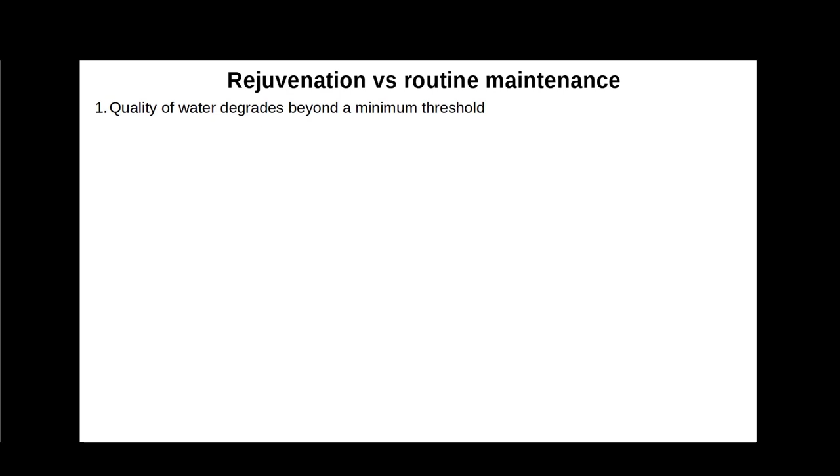Next, let us consider when we need to call for a rejuvenation instead of relying on routine maintenance. There are 4 cases in which rejuvenation is called for. 1. The quality of lake water degrades beyond a minimum threshold. 2. The health index score of the lake drops below limit.

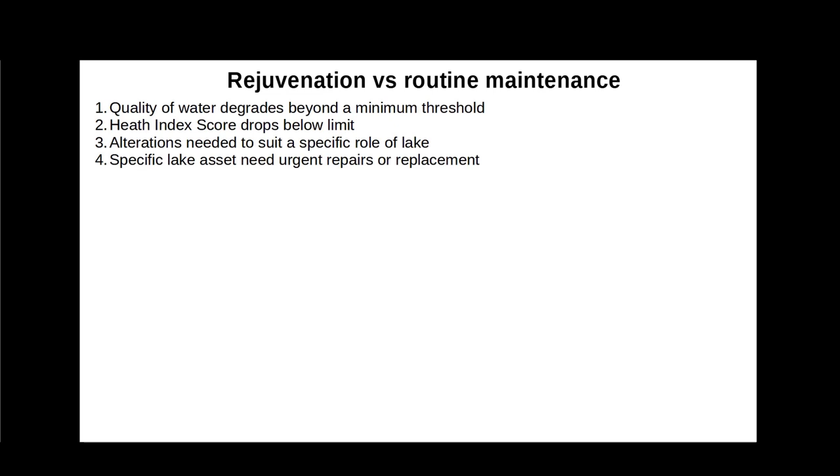3. Alterations are needed in the lake to fulfill a specific role of the lake. This typically happens when the lake is assigned a new role. And 4. Specific lake assets need urgent repairs or replacement. Here is the master list of lake assets for reference.

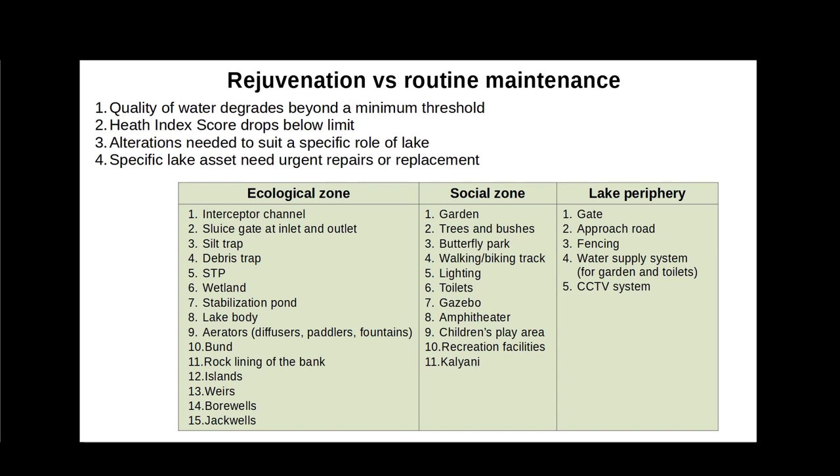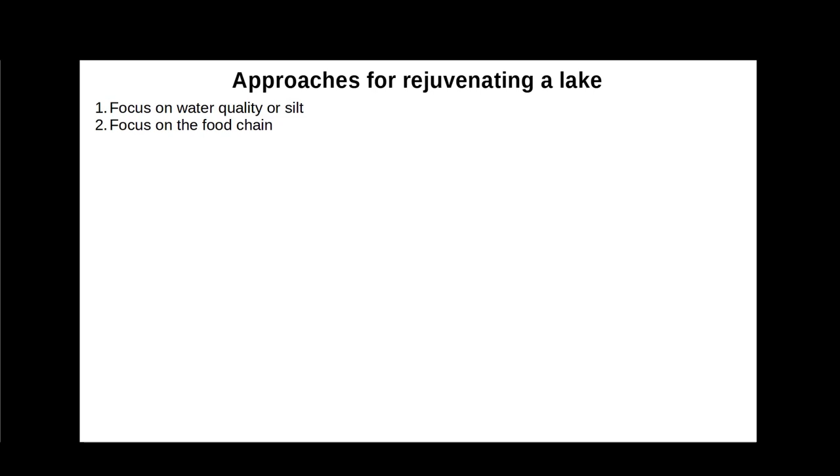The rejuvenation project for a lake can have 6 different focus areas. 1. The focus of the project is on improving the water quality or desilting of the lake. 2. The focus is on correcting the food chain, or adjusting the littoral zone of the lake. 3. The focus is on creating a habitat for specific target group of birds, etc.

4. The focus is on repairs or replacement of specific lake assets. 5. The focus is on removal of encroachment and recovery of lake land. Or 6. The focus is on changing the role of a lake, with a complete restructuring. We can think of at least 10 roles for Bangalore lakes. A lake can play multiple roles at a time.

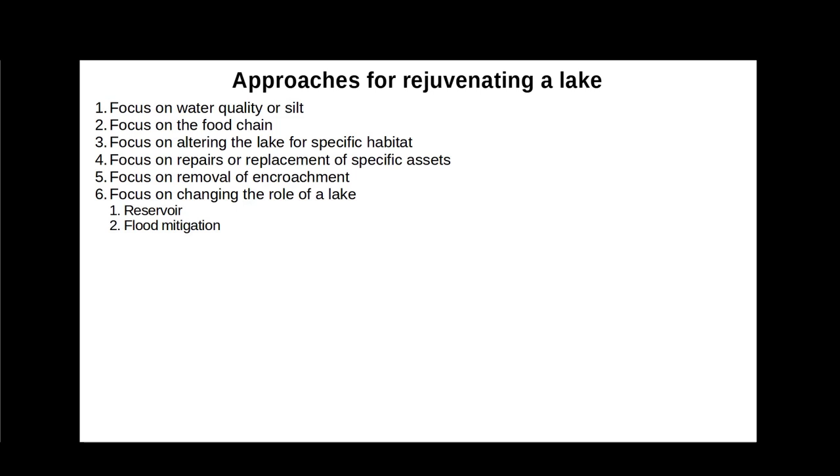1. As a freshwater reservoir. Here, the maximum holding capacity and control on water release is desirable. Also, the lake water must not get contaminated. 2. Flood mitigation. Such lake is emptied before heavy rains arrive, and they absorb the flood waters. 3. As a buffer tank, where fluctuation in the flow is absorbed by holding the water for some time.

4. As a habitat for migratory or local birds. This involves setting up vegetation for food and nesting of birds. 5. Setting up a biodiversity park for vegetation and birds. 6. Setting up jogging, walking, and biking tracks around the lake. 7. Setting up the lake as a water sports center.

8. Optimizing the lake for fishing, either as a hobby or for livelihood. 9. Setting up a children's park. And 10. A community center such as amphitheater, hall, etc. Next, we will see a proposed framework for lake rejuvenation and management, in which sweeping reforms are suggested.

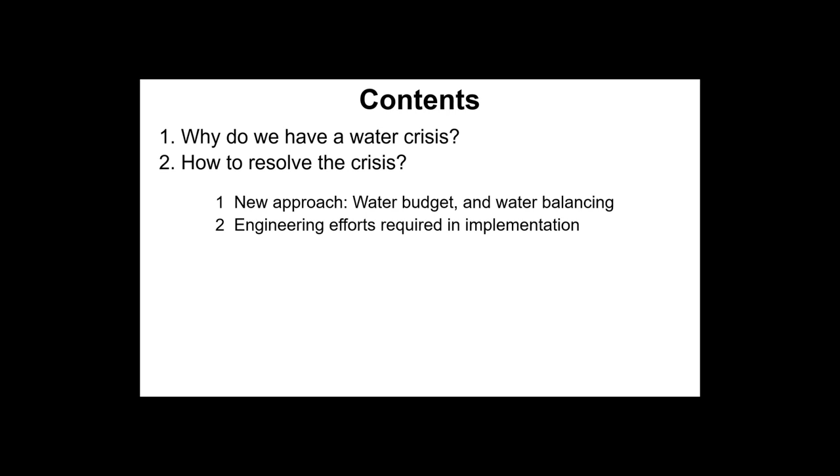In this presentation, we will cover the following topics. 1. Why do we have a water crisis? And 2. How to resolve the crisis. We will consider 4 aspects of the solution. 1. New approach in water budget and water balancing. 2. Engineering efforts required in implementation. 3. Changes required in government organization. And 4. New workflow for lake system management.

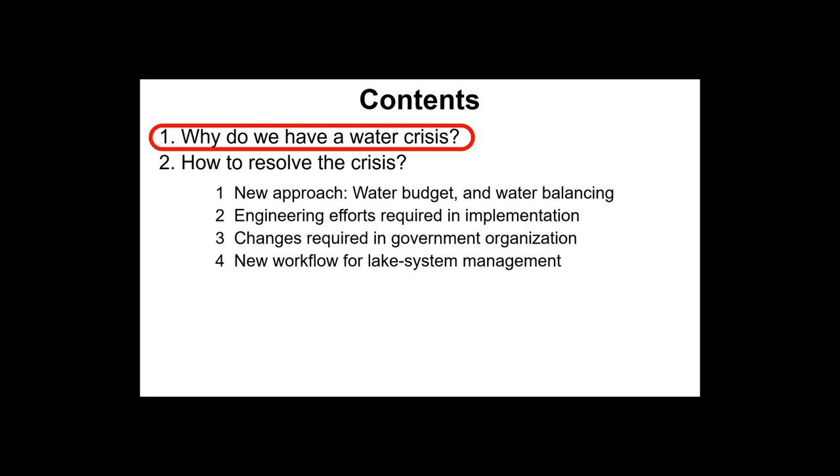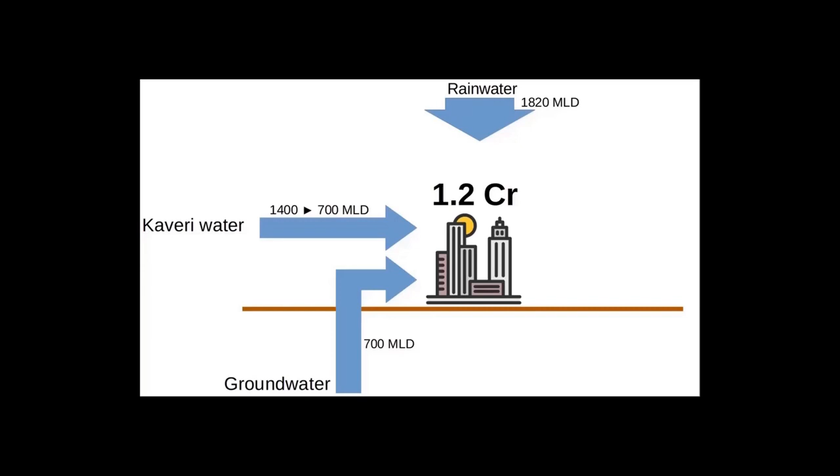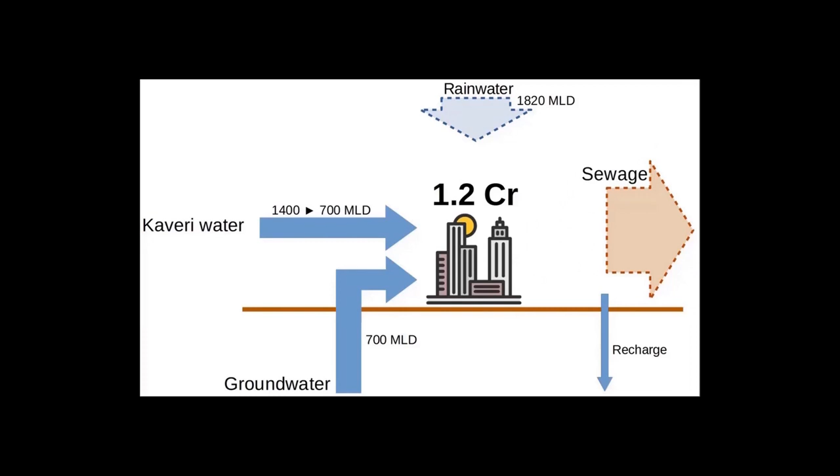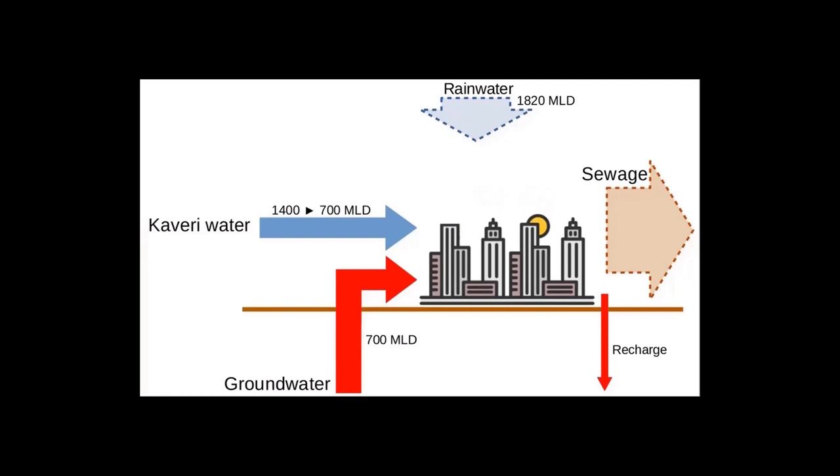Thus we draw 700 million liters of groundwater every day, and recharge only a fraction of it. As a result, our groundwater is depleting rapidly. While our water supply will not improve, our growing population will go on demanding more and more water. Thus, by next year, we will have no groundwater at all. If any groundwater is left, it will be unfit for use. We are also polluting what groundwater is left.

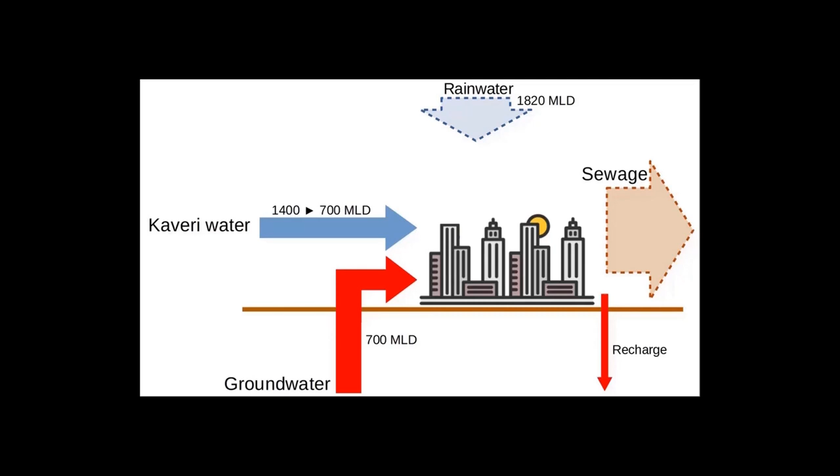In short, we will have a 50% shortage of water by next year. And that will take grip of the city gradually, not overnight. How will we deal with this acute water shortage? The only solution is to stop wasting our 2 largest water sources, rainwater and sewage.

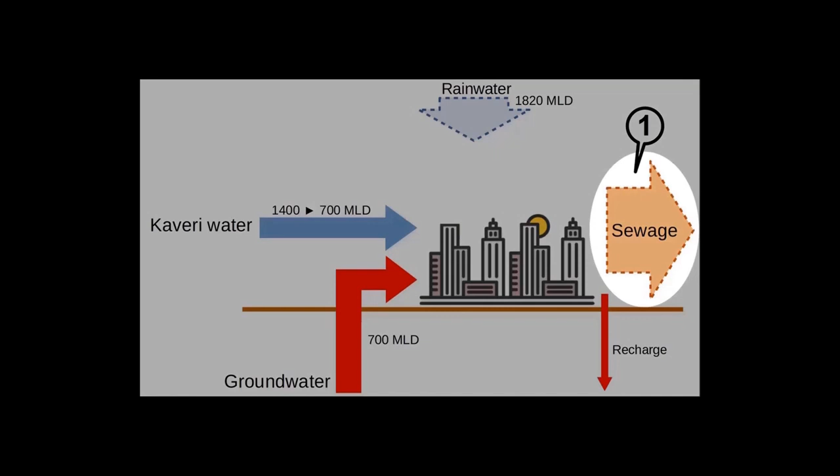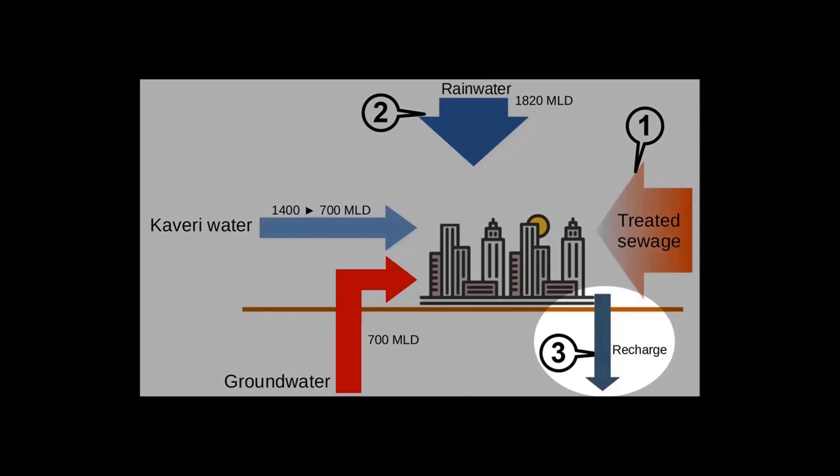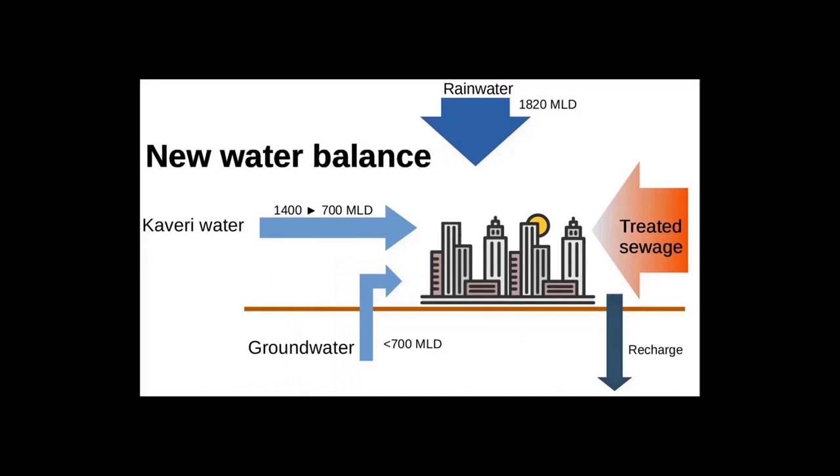Next, we will see the solution, which begins with water budgeting and water balancing. The solution consists of 4 parts. 1. Do not let the sewage leave the city, treat it and reuse. 2. Do not let the rainwater flow away. Capture it and use. 3. Boost the groundwater recharge with good quality water. 4. Use less groundwater till the water table improves. This is the new water balance, all over the city.

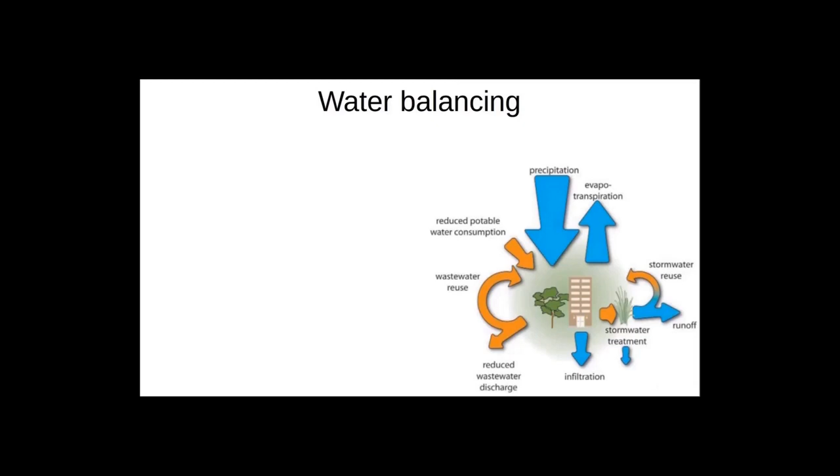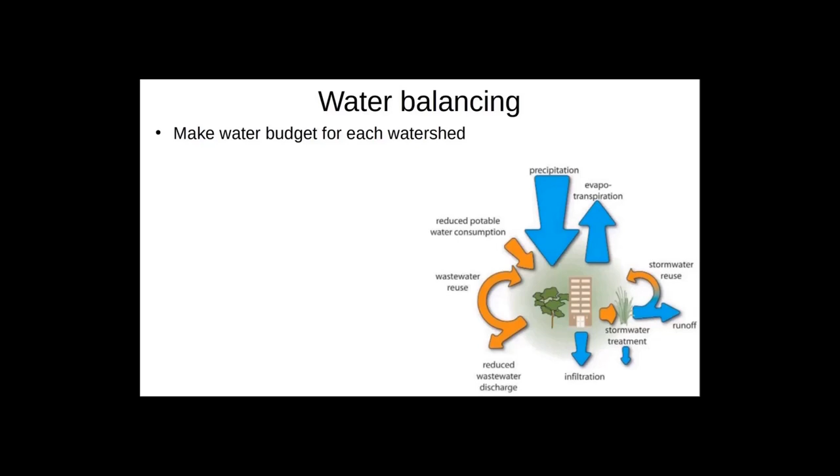So how do we implement that water balance model across the city? We must make a separate water budget for each watershed. Note that we cannot manage this task on the basis of wards or constituencies. Check how much water is needed, and how much water is actually available from different sources. Check if the available water is being contaminated. Launch drives to reduce water consumption.

Reuse the treated sewage, mixed with rainwater. The lake will collect rainwater and treated sewage in 3:1 ratio. This mix can be supplied to the area surrounding the lake. This is the new water balance, where we have enough water for our needs. But we must carefully monitor the quality of water in the drains, wetlands and lake, because that is the water we will consume.

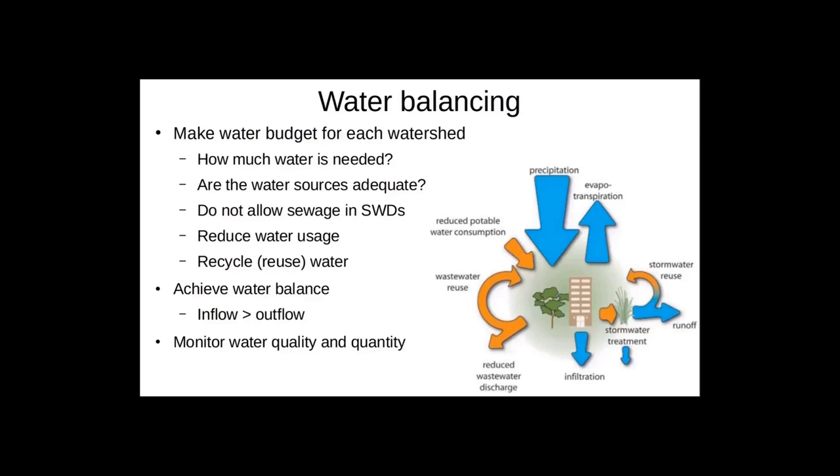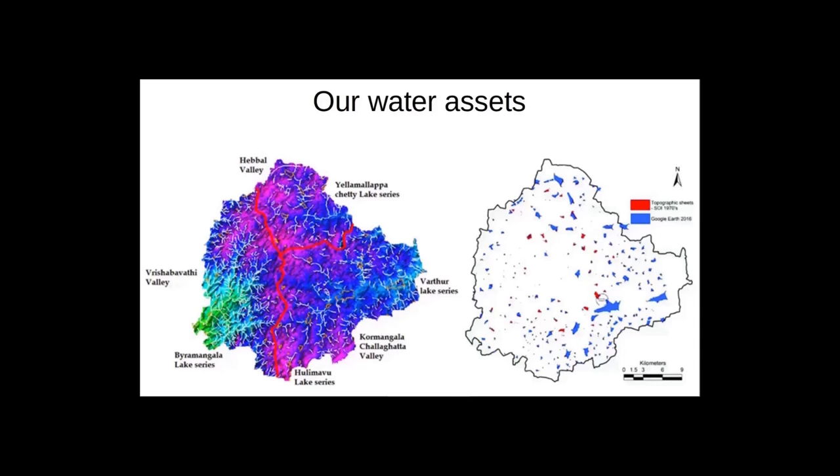To implement this strategy in the city, we must break down the whole terrain in watersheds, and then manage each watershed. These watersheds will not be contained within specific ward boundaries. To understand this, first look at our water sources across the city. The left picture shows the 3 valleys, with drains marked in white, and wetlands marked in yellow. The right side map shows our lakes. These are our water system assets. They will be used to store the rainwater and treated sewage.

This also calls for a paradigm shift in multiple areas. 1. For each watershed, set up a water budget. Account for incoming water and how much water is spent. 2. The water resources will be our lifeline. Therefore we must treat them as our precious assets. 3. Identify all stakeholders in the area, and balance their needs.

4. Involve the public in water resource management. Make all data in public domain. 5. Establish well-defined processes and declare them as public charters. Define metrics for all processes and share the data in public domain. And 6. Streamline the funding for water resource management.

Next, we will examine the engineering efforts required in implementing the solution. There are 4 major engineering challenges. 1. To provide totally separate pipelines for rainwater and raw or treated sewage. 2. To set up a large number of STPs and constructed wetlands required for water treatment. 3. To sink 1 million rainwater harvesting wells across the city. 4. Setting up the local water supply systems that recycle water in each watershed.

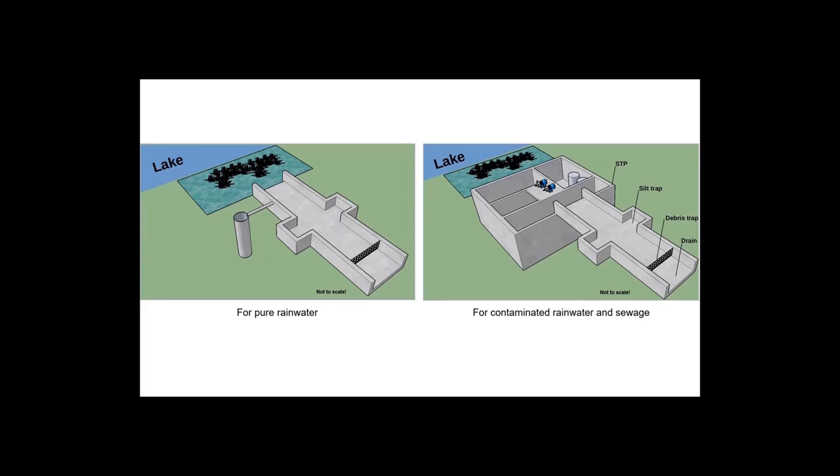Note that the overall holding capacity of the city lakes may not be sufficient. In that case, some water treatment may have to be done outside the city limits. In other words, we may need to set up the same infrastructure outside the city.

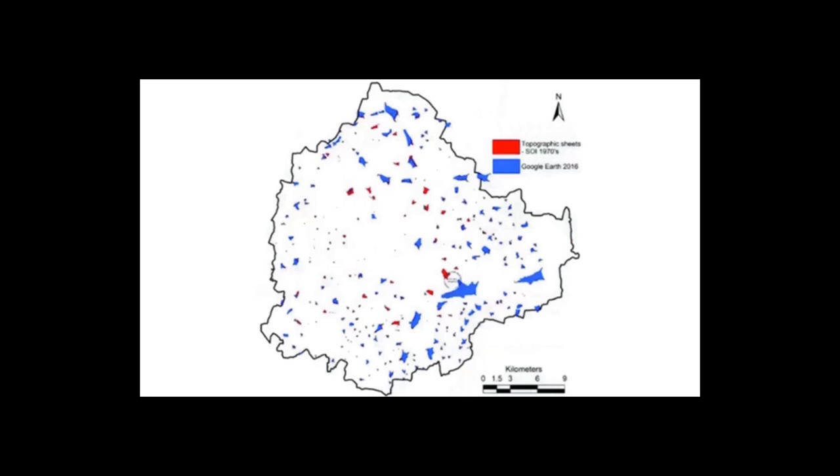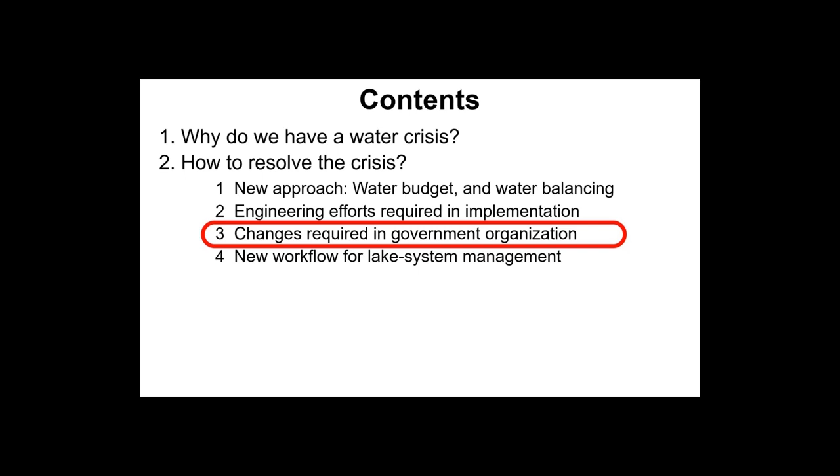In the previous section, we listed various water assets, which need to be used as a single system. However, the main problem is that these assets belong to different agencies. As a result, they do not plan and manage a unified water system. Therefore, for smooth implementation of the solution, some changes are required in the government organization. Now we will see how a change in the government organization streamlines the process.

Set up a central leadership with a single deliverable, which is integrated water resource management. Set up a cross-disciplinary expert team to guide this central water authority. The same team must reimagine the entire workflow and processes for water budgeting and management. All lake-related assets must be designed and managed as a set. This includes stormwater drains, sewerage lines, all STPs, rainwater harvesting wells, wetlands, and lakes.

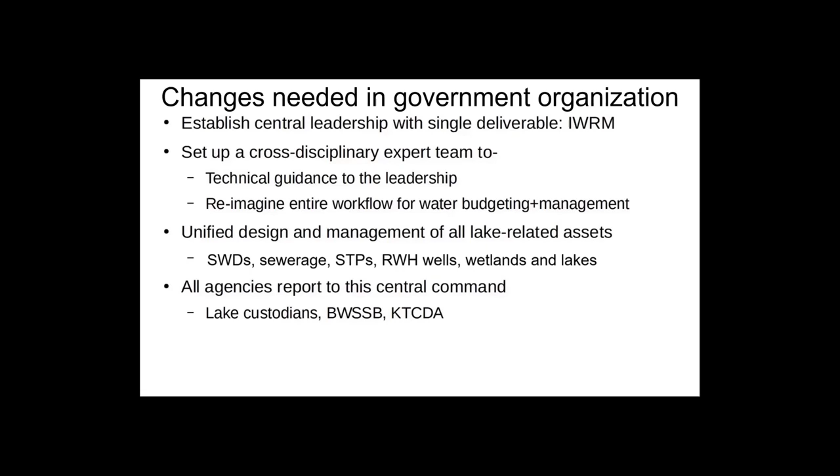All agencies dealing with water in any form will report to the Central Water Authority. These agencies include lake custodians, BWSSB, and KTCDA. Finally, the state government must allocate adequate budget for the water management. It must be recognized that the CSR contribution will amount to 5 to 10% at best.

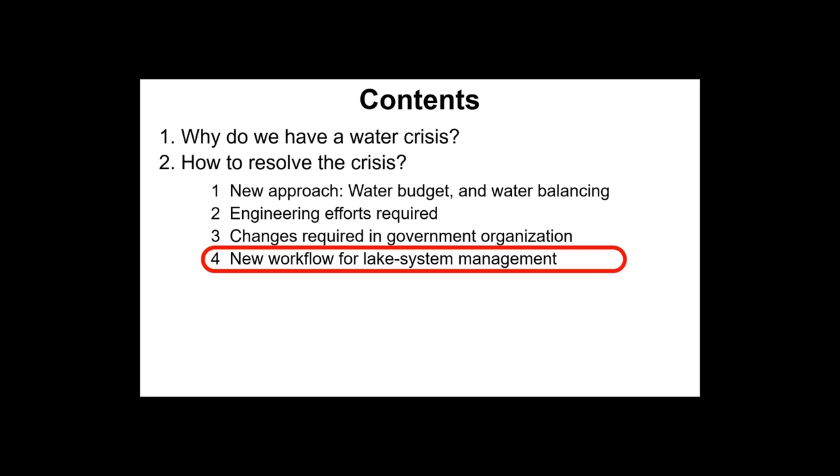Currently, lake rejuvenation projects are taken up sporadically. Even after the rejuvenation, the lake continues to receive sewage. Thus all the effort is wasted. Worse, rejuvenation of the lake does not contribute to the city's water management goals. Next, we will examine the new proposed workflow for lake system management.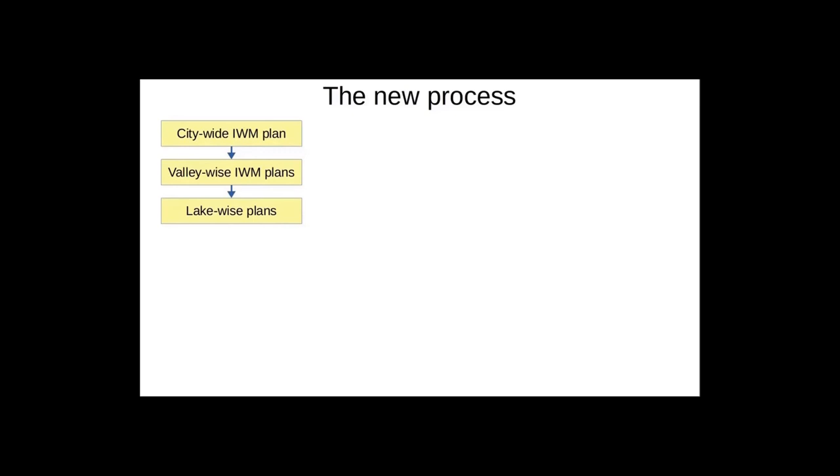The process starts with a city-wide integrated water management plan. From this, valley-wise water management plans and targets are derived. From these valley-wise plans and targets, lake-wise plans and targets are derived. At this stage, we need to form a lake committee from all stakeholders.

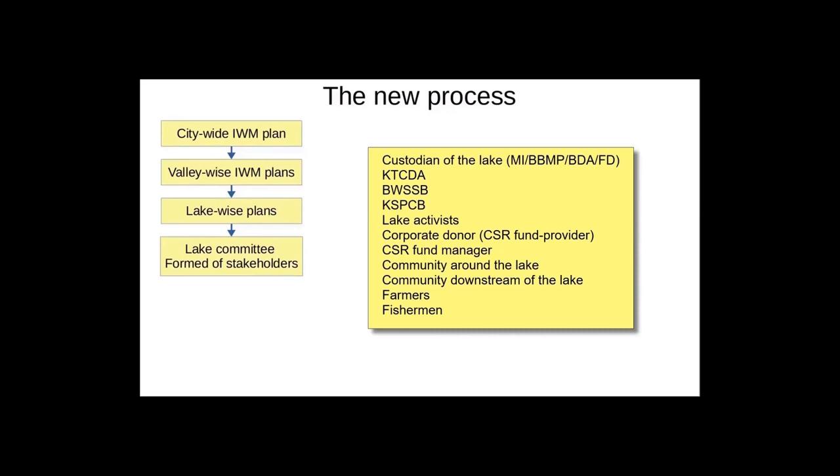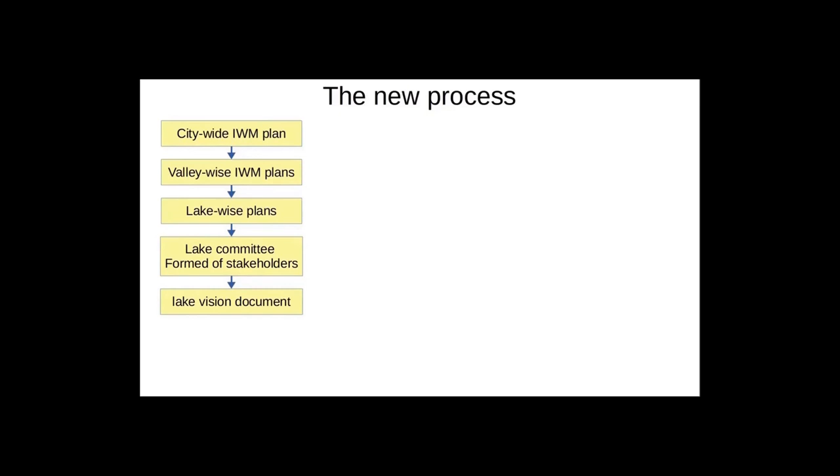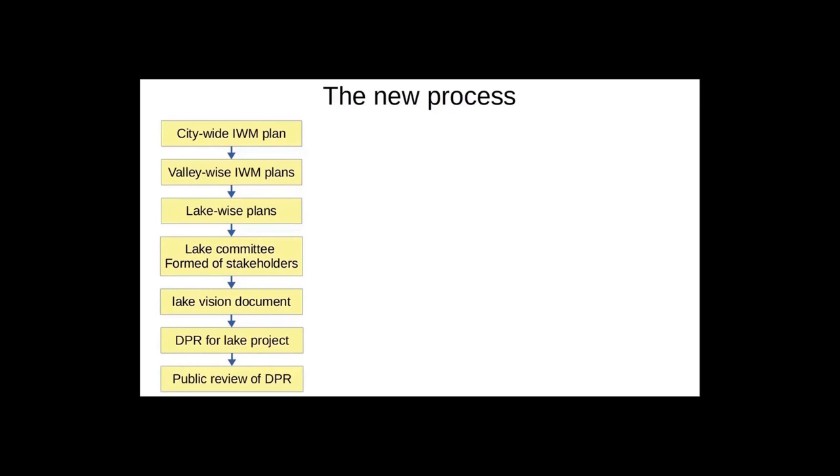This team defines the lake vision document, with local aspirations. A detailed project report is prepared based on the lake-wise plans and lake vision document. This DPR is reviewed by public, and the lake team deals with all objections. This DPR is passed through a single window clearance system.

Based on the approved DPR, tenders are invited. The approved DPR is also used to attract sponsors. The state undertakes to provide the main funds, supplemented by the CSR funds. All details such as scope of work and sponsorship are finalized.

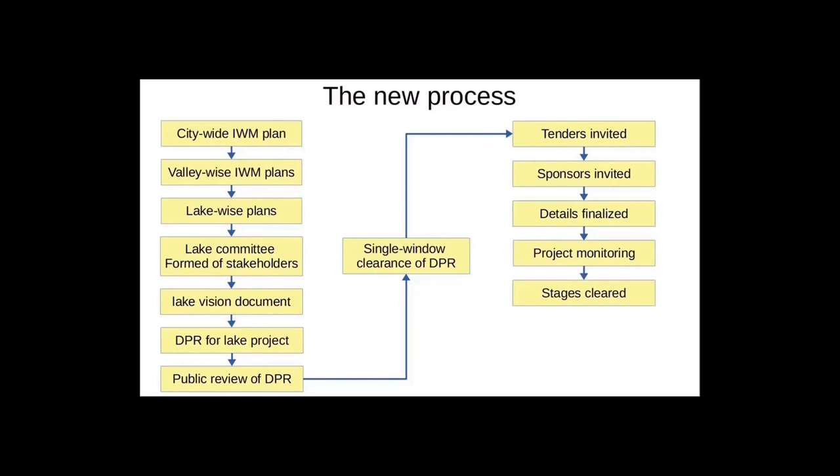The lake team monitors the progress of the project. The project is cleared stage by stage. As each stage is cleared, its payment is made to the contractor. Timely payments are crucial to ensure that there is no corruption. Once the project is completed, the team switches to day-to-day management mode. A separate contract is made to drive the lake system management.

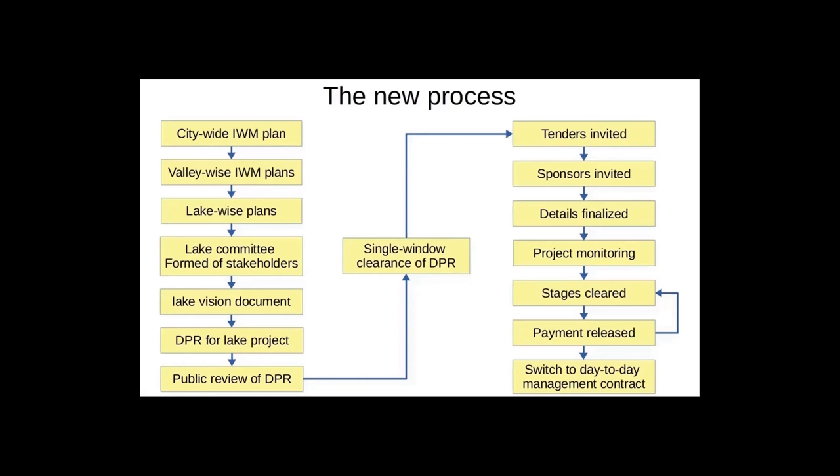We also need to re-engineer all the processes and procedures. We will see the existing shortcomings and the proposed improvements. These changes address 4 goals. 1. Management of lake system must be asset-based. 2. All stakeholders' needs must be balanced. 3. All stakeholders must be involved actively. 4. Governance in management of government and CSR funds.

First, we will see the changes needed to ensure that the management of lake system is asset-based. 1. Lakes are not valuated at all. Their value must be counted in terms of assets. 2. Government takes credit for announcing large budget projects, which don't materialize later. Credit can be given only when assets are actually created or rejuvenated.

3. Projects have questionable results. Projects must have specific asset-based targets. 4. There is no accountability for project spending. We must establish asset-wise accounting of spending. 5. Custodians get away with mismanagement of water assets. We must conduct social audit of assets to bring accountability.

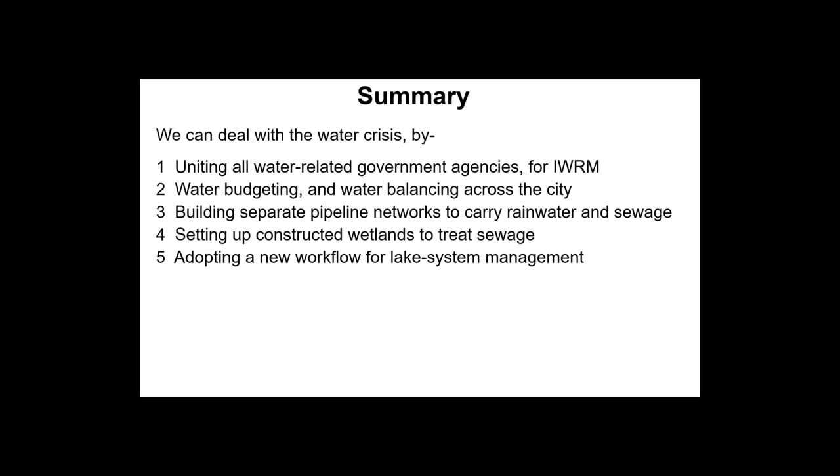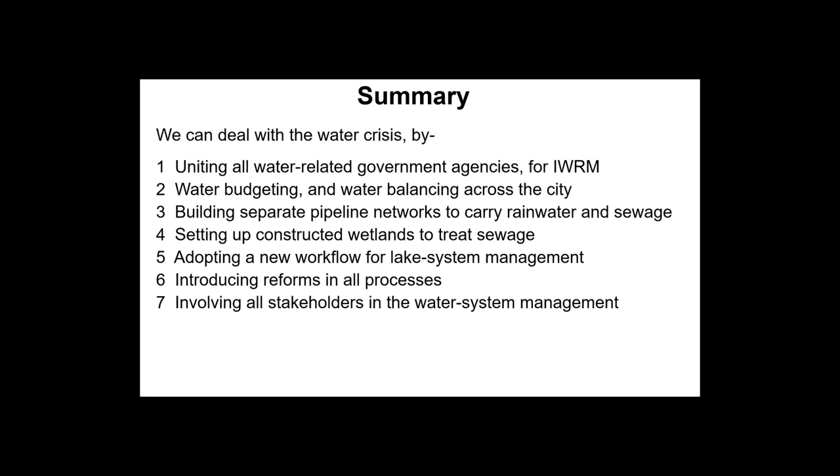To sum up, we can deal with the water crisis by 1. Uniting all water-related government agencies, for integrated water resource management. 2. Water budgeting, and water balancing across the city. 3. Building separate pipeline networks to carry rainwater and sewage. 4. Setting up constructed wetlands to treat sewage. 5. Adopting a new workflow for lake system management. 6. Introducing reforms in all processes. And 7. Involving all stakeholders in the water system management. Thank you.